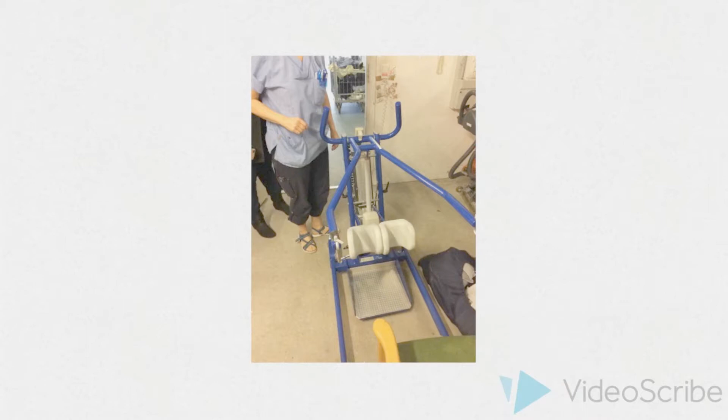Before designing the new overhead crane, we did some market research. There are 3 different types of cranes used at the elderly homes. First, there's the stand-up crane, which helps people who are seated to stand up and move around in the standing position. Therefore, its functionality is limited.

Secondly, there's the floor crane, which helps people in the case that they fall and are not able to get up from the floor. In this crane, the elderly feel unsafe due to the construction. Thirdly, there's the overhead crane, which is the most flexible and stable of the 3 cranes. It represents an important part of the daily life at the elderly home, as it can be used for nearly all kinds of residents regardless of their condition.

Because we believe that the future lies in the overhead crane, we came up with our own solution for this type of crane, with some new and innovative features that improve upon existing solutions. The Upigo crane improves upon user-friendliness, it is completely motor-driven, and provides high safety. When using our crane, the user is not exposed to physical strain. The crane provides a high comfort level and is made of high-quality components.

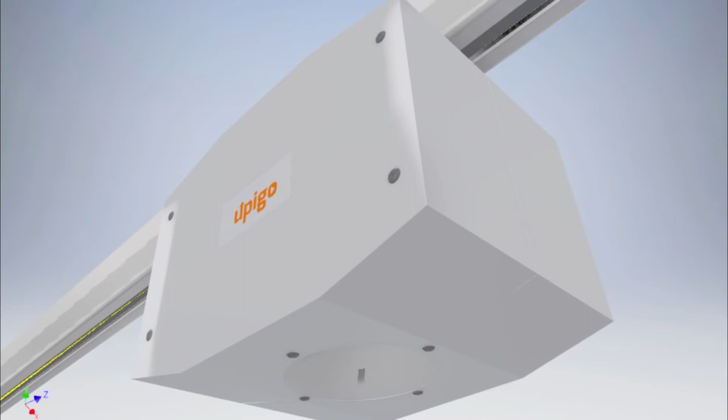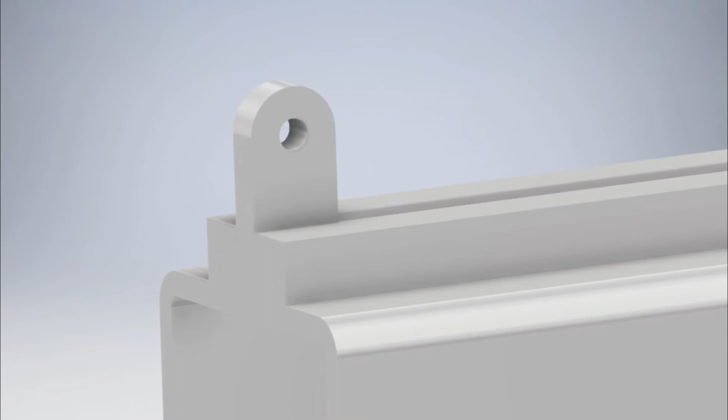The Upigo overhead crane basically consists of 2 runways, the bridge, and the device running on the bridge. The 2 runways and the bridge are made of stainless steel in order to provide high safety and the best possible stability. The runways feature a rail inside of which multiple attachment points can be slid in. This ensures flexible and reliable attachment to the ceiling.

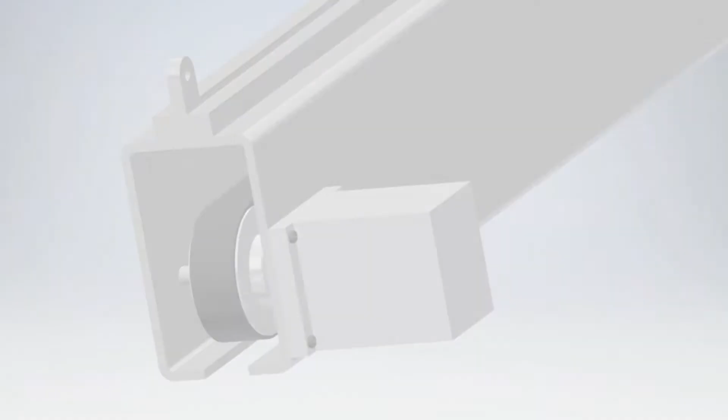Within the runways runs the runway trolley on which the bridge is slid on, and within the bridge runs the bridge trolley on which the device is slid on. Both of the trolleys have smooth running and quiet plastic wheels and are dragged by a toothed belt running around aluminum gear wheels driven by a motor mounted on the outside of the respective beam to make it easily accessible for maintenance. The device is enclosed in a plastic cover, while the cage of it is made of stainless steel to withstand the load acting on it.

In order to make it possible to turn the lifted patient to any desired angle, there's a drum within the cage which is able to turn by 360 degrees, driven by a gear wheel. Inside of the drum, the strap that comes out at the bottom center of the device is wound by a winding wheel which is also motor driven. The Upigo overhead crane is therefore a very reliable and convenient solution for any elderly home.

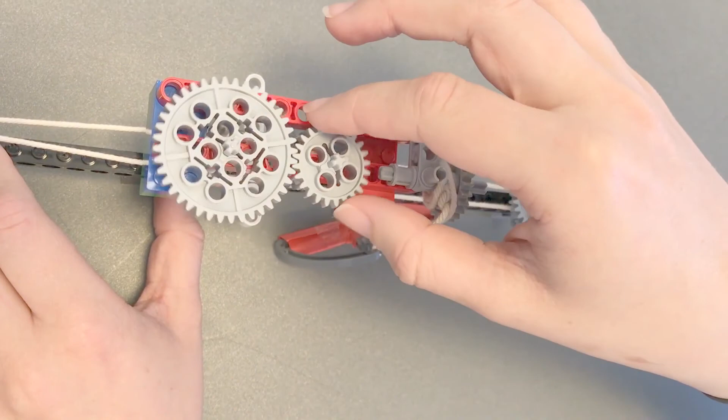Now more about the functionality of the crane. The drum inside the device is turned by the motor-driven gear wheel. The winding wheel within the drum winds up the strap with the carry bar. Gear wheels on both runways turn the toothed belt which drives the bridge across the ceiling.

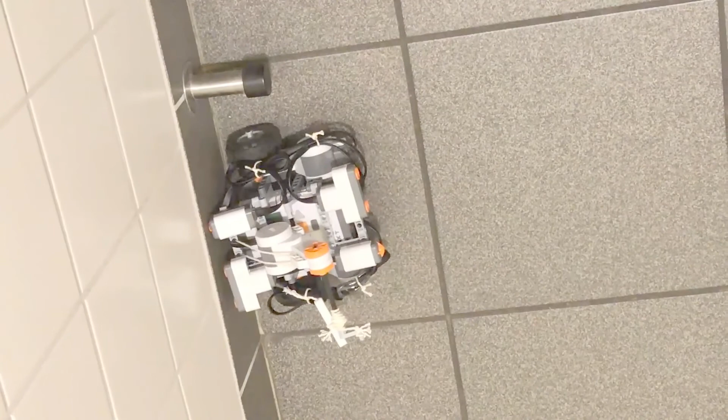The crane can move backward and forward when one of the buttons is pushed, until the touch and ultrasonic sensor detects an object less than 20 centimeters away. Then it will automatically move slower. It should then continue at slow speed until the user manually stops it or until it touches the wall.

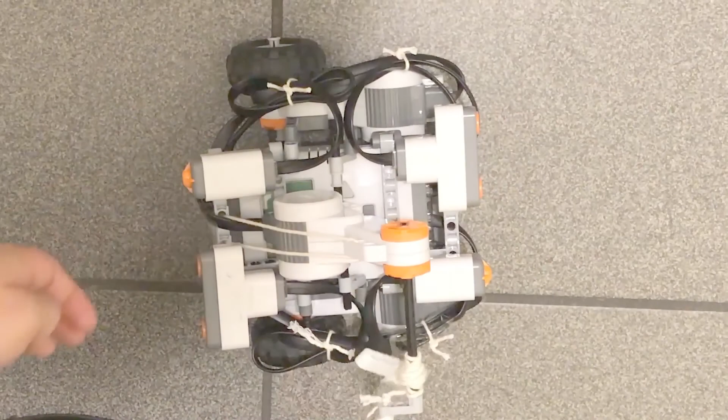By pressing a button, the user can decide when the strap is going up or down. When the strap is down, the crane is not able to move for the sake of the person's safety. On top of that, the crane is able to turn 90 degrees when the button is pressed.

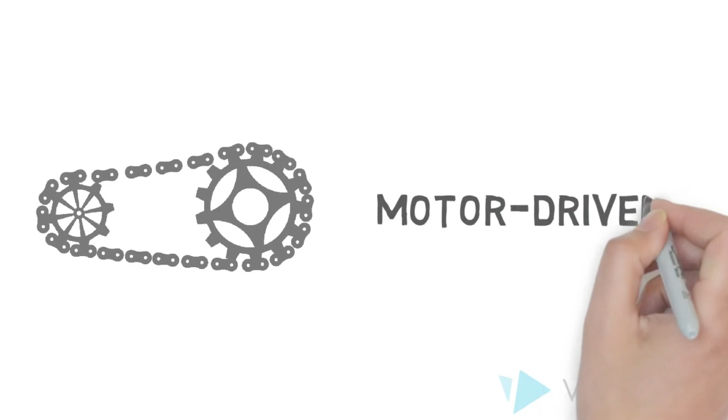So why should you choose Upigo? Well, here are the reasons. First of all, our crane is completely motor driven. This means that there is no physical strain involved for the employees. Therefore, the employees can be completely focused on the person's welfare.

On top of that, the Upigo crane can be operated by only one person. Because of that, you'll save up to 250,000 crowns per year per Upigo crane. Upigo, up and down, safe and sound.